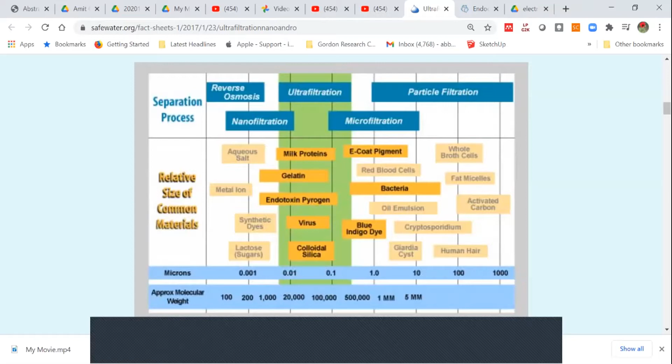So for that, we need to use what is called nanofiltration. A study now going on at Sde Boker at the Zuckerberg Institute of Ben Gurion University, led by Dr. Oded Nir, is shown in the next short clip.

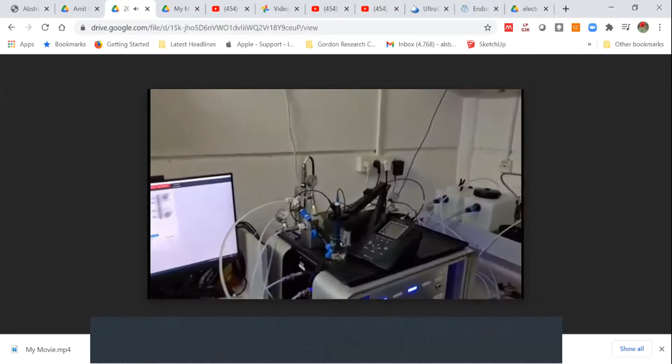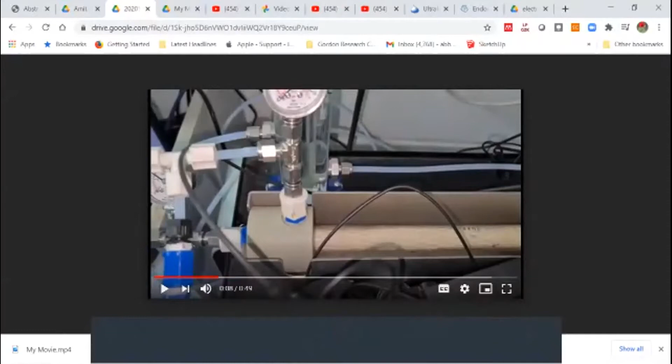Here you can see the automated system. This is a computer-controlled filtration system, and the heart of it is this hollow fiber module containing nanofiltration membranes. They're a specially developed membrane put together by the German collaborators at the University of Aachen, with Dr. Nir. These fibers are capable of retaining small compounds, endocrine disrupting compounds, and other kinds of contaminants. In addition, this membrane can retain inorganic ions such as phosphate, and by concentrating up the phosphate, it's conceivable it could be recovered.

If we take a look over here, we can see the feed container with the real effluent, and this is a concentrating system where it's running up. As the effluent is concentrated, what you see is an in situ camera looking at the suspension inside the municipal wastewater. As the phosphate concentration goes up, it can precipitate as calcium phosphate, which could then be recovered as a nutrient, something that could be contributed for fertilizer once it's been concentrated up.

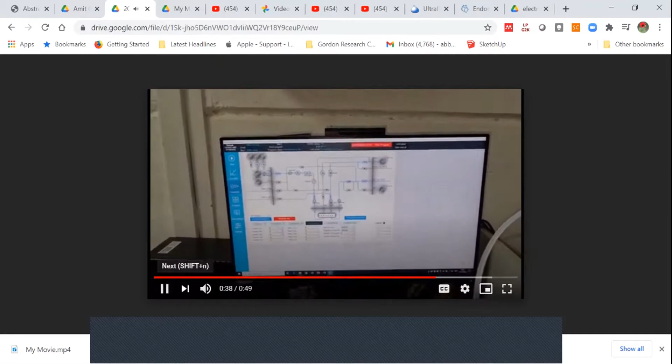As I said, this whole system is integrated with computer control and computer registration of the performance of the membranes. You can see the performance on the screen here. This is the flow sheet of the process, and now they're showing the performance.

What you see here is the flux in these hollow fiber membranes, and here you can see the transmembrane pressure drop. For the time they're running this particular experiment, with the concentration they've done so far, they've been able to run without any significant fouling, as the transmembrane pressure stays constant with the flux staying constant.

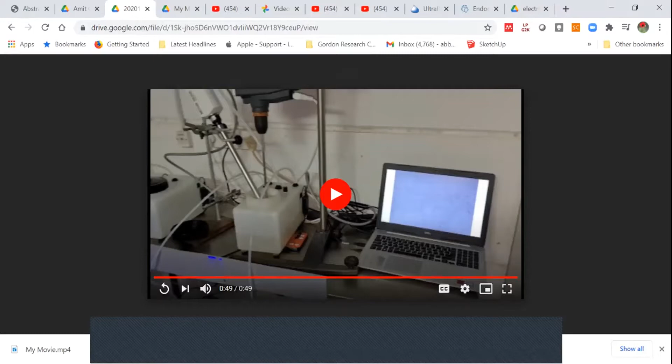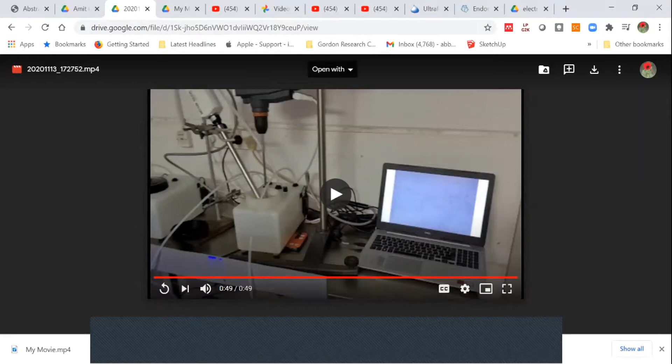So this is at the level of feasibility studies now being done in the laboratory, and we're now going to take you from the most basic lab scale to the largest scale, doing a guided tour of the Shafdan sewage reclamation plant, the largest sewage reclamation plant in Israel, treating all the water of the greater Tel Aviv area. As we'll see, that water is then being used for agriculture here in Israel.

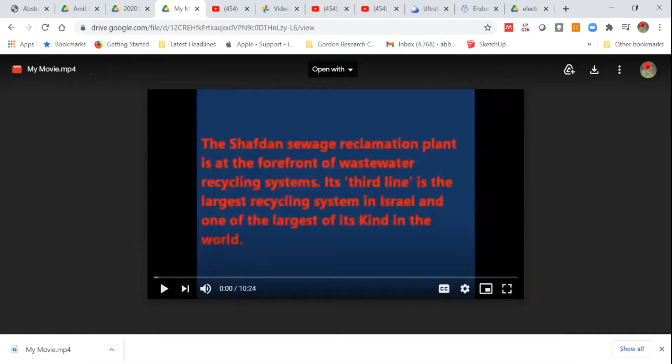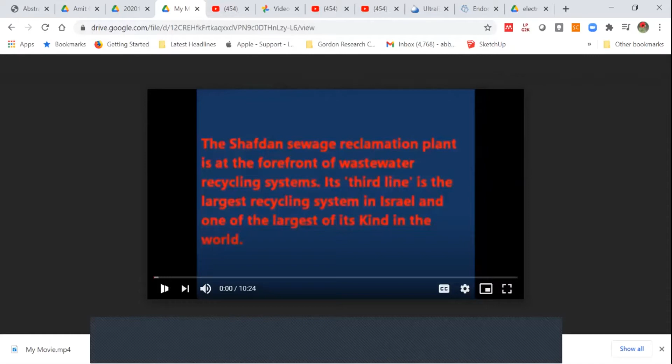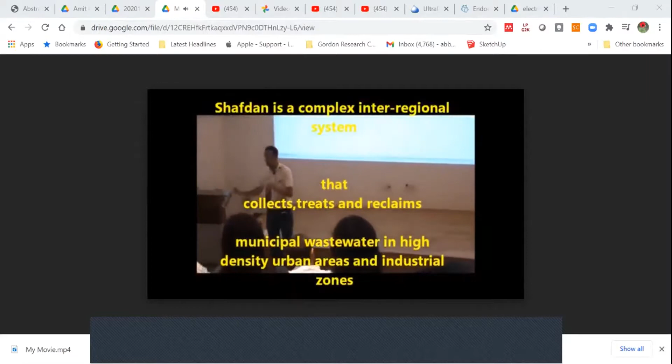I'll just comment before he goes on that in actuality, this water is not used as potable water. If someone drinks it accidentally, it's okay, but they actually have it running through separate lines that are not potable water lines, but lines for irrigation and agriculture. However, it is treated to a very high level, but it is not intended to be used as drinking water, but rather as irrigation water.

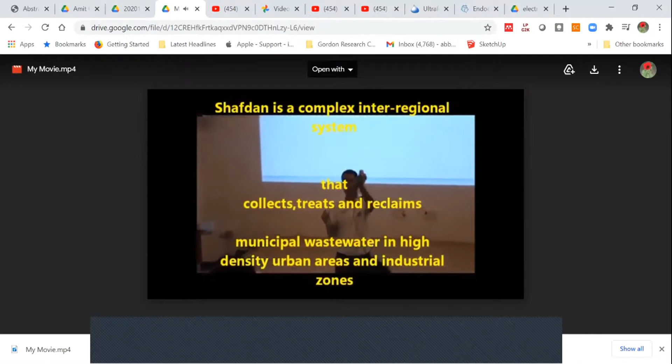We'll talk about sewage and how on earth to take this disgusting thing and transform it to potable water. Picture it. There you go. Now I feel like the president.

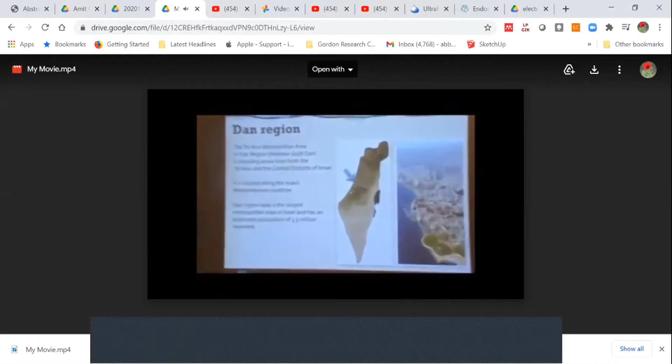And as you see, the map of Israel, and we have Tel Aviv City. You've been to Tel Aviv before? So Tel Aviv City, and the city that surrounds it, the metropolis, that's what we call Dan region. And it's the center of Israel. Why do we call it Dan region? Do you know?

So 3.5 million people in that region, and the biggest wastewater treatment plant in the Middle East, and one of the largest in the world. This is how it looks all about. Now beneath that region, 30 meters beneath the ground, we have a conveyance system.

To take the solids out of the wastewater, we have the bar screens, the pre-treatment. Basically huge combs that separate the solids from the water. This is how they look in real life. Soon, we'll see how they really work. This is how it looks. Very beautiful. There you go.

There is the scum. Here's a close-up. And another one. Very romantic. And it all goes out to a big trash container. From the trash container by truck, or to recycling, or to the dumping sites.

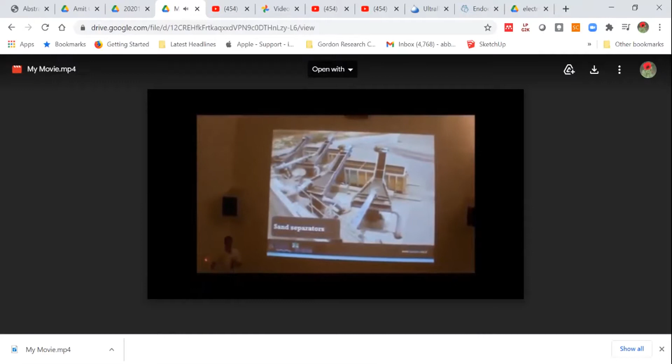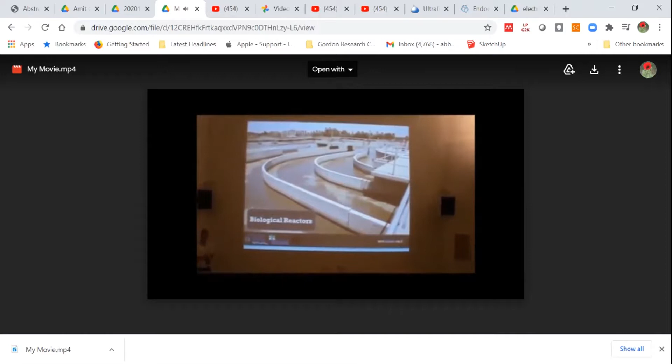Finally, we can start purifying the water. Biological reactors: all the wastewater and the nutrients are here. Then we have pathogenic diseases, we have the ammonia, we have the good bacteria that digest it. What will you do? This is actually separated into 3 stages: aerobic, anaerobic, and anoxic — with oxygen, without oxygen, and with certain levels of oxygen — to get rid of the pathogens, and then chlorine to kill some pathogenic bacteria.

In other countries in the past, they didn't really have plants like this because they had a lot of water, or they didn't have water but didn't have the money to do it. So these days, slowly, the world is waking up and started to build wastewater treatment plants. In Europe, we have a lot of them, in the United States, some even in Africa, in China, Singapore, all over the world.

It was one of the first. 10 years ago, it was the largest in the world. Today, it's only the largest in the Middle East. A lot of Israeli companies go around all the time building these facilities all over the world.

These days, in Nevada, California, Australia, China, and Zanzibar, all the time we're advancing. They're getting the money either from UN investments, or they have their own money, such as Nevada, California.

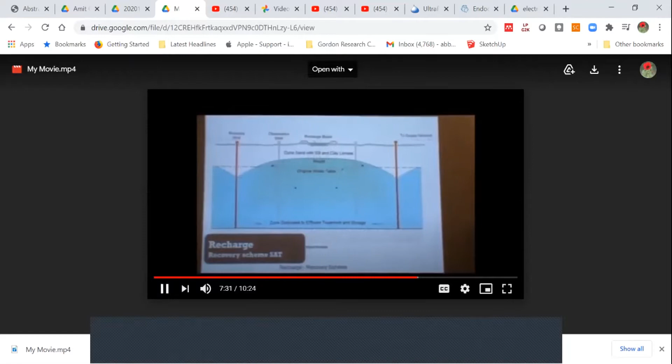And now we're going to see the real plant and the real machine. Hope it's a good day today. Seems like it. We will find out soon enough.

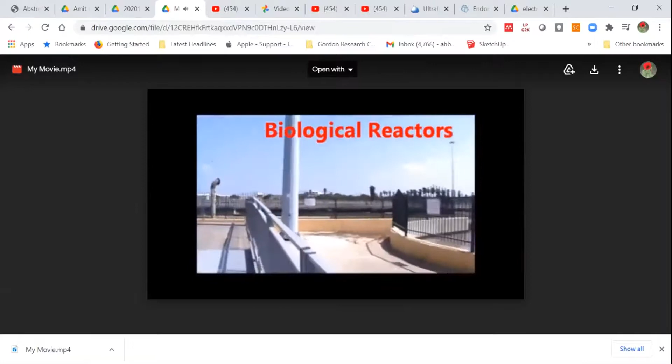There we are, I see you can smell it. Very nice smell. Inhale, exhale, very nice. From here, this stage, you can see the biological reactors to our left, to our right, and even in front of us. Aerobic, anaerobic, and anoxic stages will deal with the pathogenic bacteria and the ammonia.

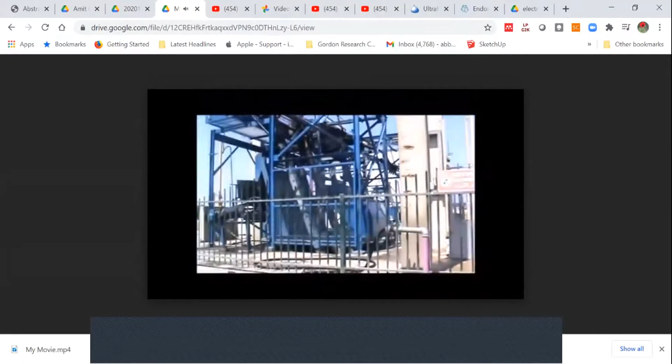Okay, so this is settling basin 1 out of 12. What happens here? This is the secondary effluent, which is why it smells better. After 1 day we have it here. At the beginning of the plant we have 20 bar screens that separate 40 tons of solids every day. Why do we have them again here? Because the pools are open - a pigeon can rest in peace here.

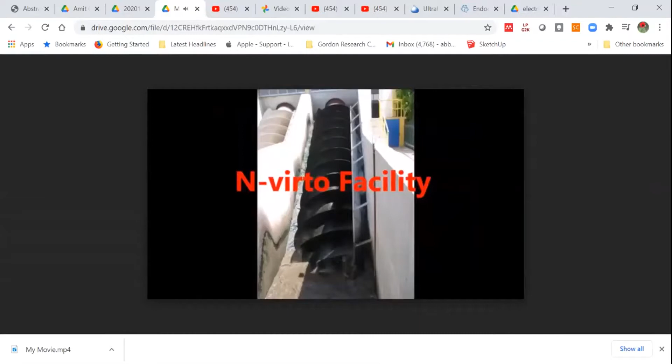So it takes the garbage out. So what do we see here? A settling basin - as we said, we have 12 of these. What happened to the sludge that we took out? 70% of the sludge will be returned to the activated system, to the biological reactors, the big pools with all the water in them - that's how we always have a lot of the good bacteria. 30% we need to recycle.

So that gives you a bird's eye view of the Shafdan plant. Today, Israel is recycling over 90% of its wastewater for agriculture, by far the highest extent of any country in the world, and that's why we're able to reduce the freshwater requirements of Israeli agriculture. Now we're going to look at the wastewater effluent, not from the point of view of agriculture, but from the point of view of epidemiology - that's coming up in the next clip.

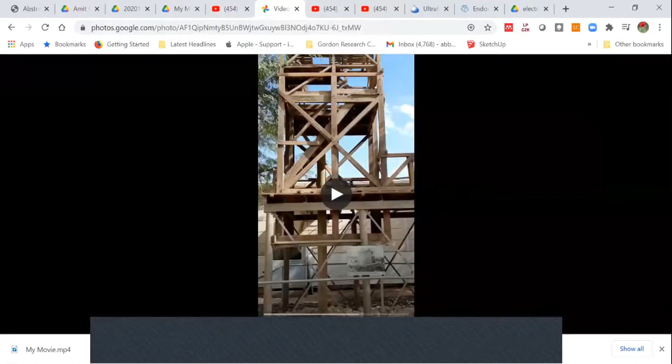Essentially, desalination with membranes began in Israel in the 1960s. It was preceded by seminal theoretical work done by Professor Ora Kedem and the late Professor Aaron Katzir, who developed the basic theory for the transport of salt and water through membranes.

There were two membrane-based processes that were looked at, both examined in the mid to late 60s. The first was electrodialysis, in which feed water comes into a chamber bounded by an anion exchange membrane and a cation exchange membrane. The electric field applied pulls the ions out into a concentrate chamber, adjacent to the diluate chamber, the product water chamber, and in this way is able to desalinate the water.

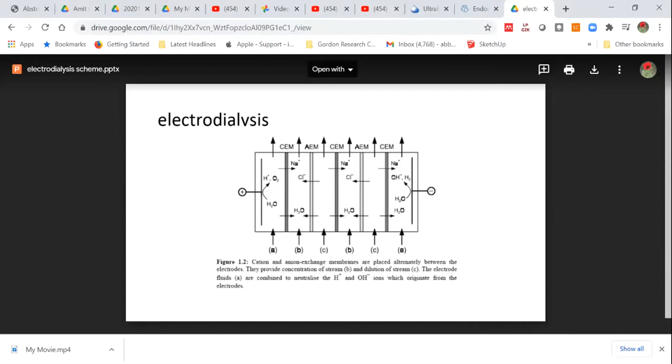Electrodialysis systems were developed and put into place at the Institutes for Applied Research, which was an institution that preceded Ben-Gurion University, and from that group came part of the Desalination and Water Treatment Department that is now part of the Zuckerberg Institute. The first system that was set up was not too far from Midreshet Sde Boker.

Modern day desalination in Israel began over 50 years ago in 1968 when an electrodialysis desalination unit was placed in Mashabei Sadeh, just a 6-7 minute drive from Sde Boker. This led to the preparation of reverse osmosis desalination based on the invention of the late Professor Sid Loeb, who made desalination membranes inside 4 to 6 meter long half-inch tubes, prepared inside the system shown here.

Here you can see a long cylindrical vertical channel in which the membranes were placed, and a polymer solution was drawn up through the inside of those membranes to put a thin polymer coating on the inside, so that they could pass water and stop salt in the reverse osmosis process.

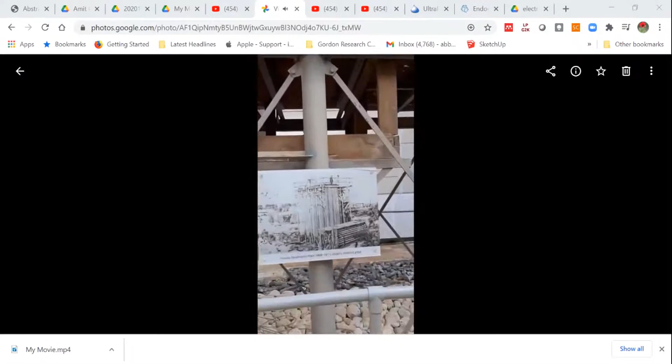Those membranes were then installed in a unit that was put in Yotvata. You can see the picture here of the plant at Yotvata, where they provided the first desalinated drinking water for this settlement in the Arava.

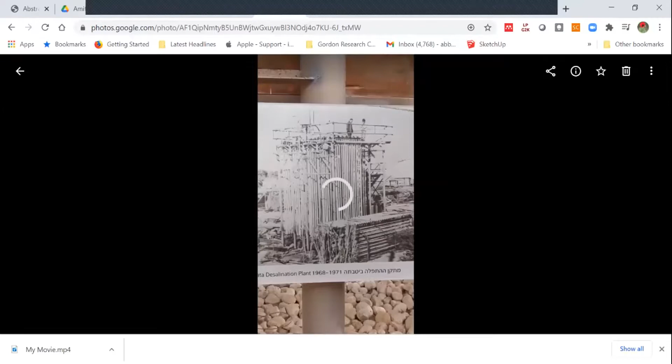It's hanging up right now. Just a second, let's see if we can get this to work. Okay, we have a problem with that particular film. I'll go on to the next one. Stop share, and I'll do share screen again.

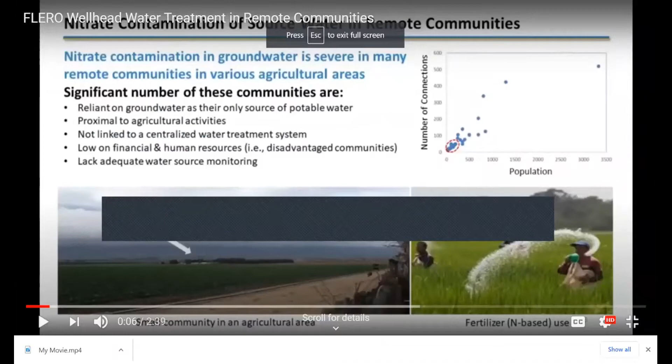What you see here is a problem with nitrate contamination and salt contamination of groundwater in communities with intensive, industrialized agriculture. Communities of farm workers living on this land are left with water that is not fit for drinking, facing difficulty obtaining a reliable source of potable water because of both salinization and increasing nitrate contamination of the groundwater from agricultural activity. So a system needs to be found to provide a solution for these communities.

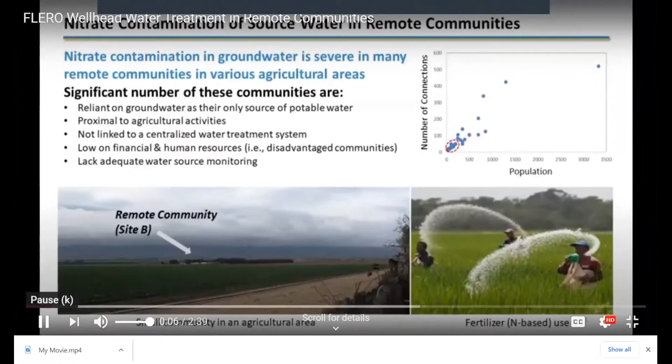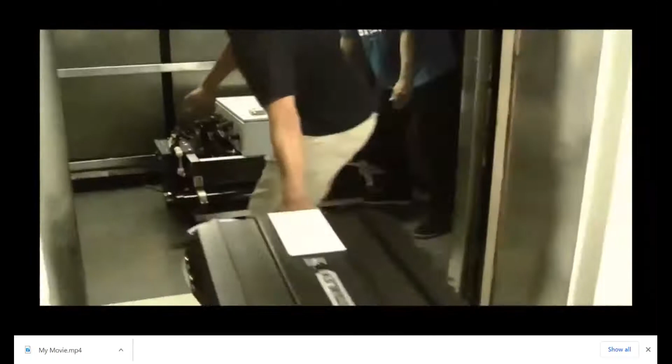So you can see the reverse osmosis system that's going to be used. Flero is a novel smart RO system of compact design that can operate seamlessly across a wide salinity range, from brackish to seawater. This short video clip documents a recent field test of Flero in the California San Joaquin Valley. Flero, along with its various sensors, including our newly developed nitrate monitoring system, were transported from UCLA to our field site. We reached the field site in about 3.5 hours.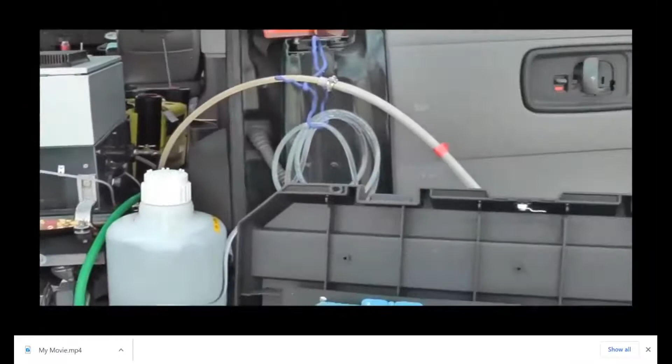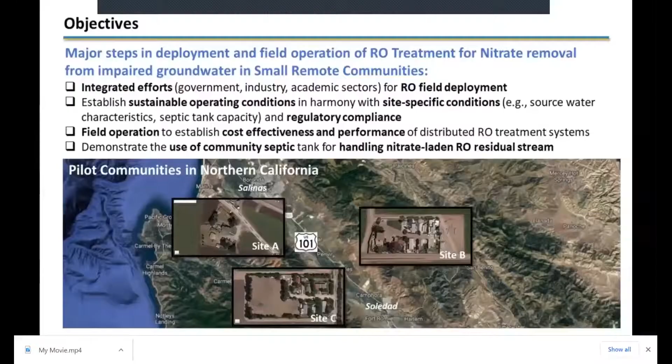So this is a case where, again, there's nitrate contamination, and small remote communities need a system matched to their needs, because of site-specific conditions, like septic tanks that limit what they can do, and regulatory compliance. Essentially, they need to handle these nitrate-laden systems, where they get a high nitrate concentrate from the RO system, and design it so that those high-nitrate brine systems can be treated by their community septic tanks.

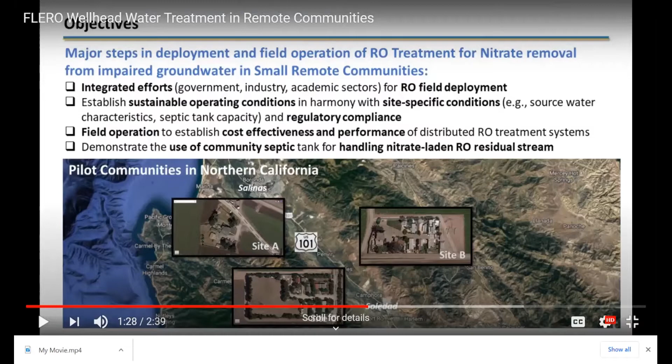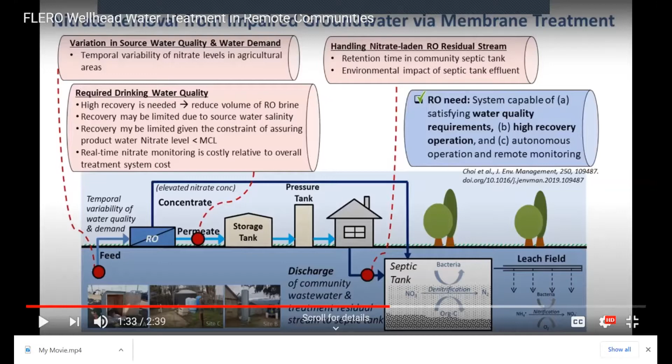So here you can see what needs to be done. They take the feed from the groundwater. Permeate is, of course, used by the household. The concentrate plus the household sewage together go into the septic tank, where they undergo denitrification. Once denitrification has been completed so that there are not high nitrate levels, they can discharge from the septic tank into a leach field. So in this case, they needed high water quality, but also high recovery operations so they wouldn't waste this precious resource.

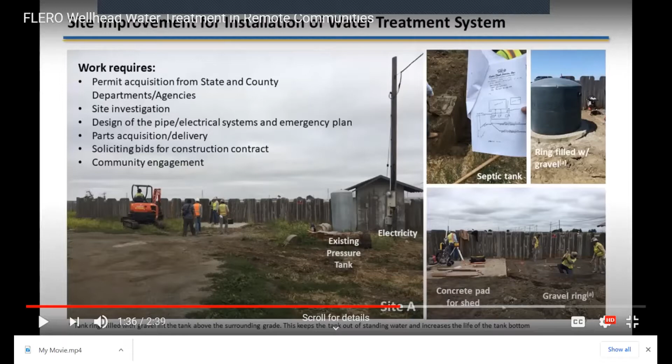That's quite high. To develop the system and make it an automatic system they knew would work properly, they developed their own proprietary nitrate sensors that could monitor the nitrate both in the feed and in the permeate as a way of determining that they were getting the performance they needed.

Okay, so that covers the flexible RO system. This is a system for small communities where you need something that's distributed. Those of you that heard the lecture of Professor Amos Winter in the Water and Agriculture session earlier today heard about the same kind of challenges that system was designed to cover. This system is equally designed to cover a distributed system that can be deployed where there are small communities that need improved quality water from the degraded water sources that presently exist.

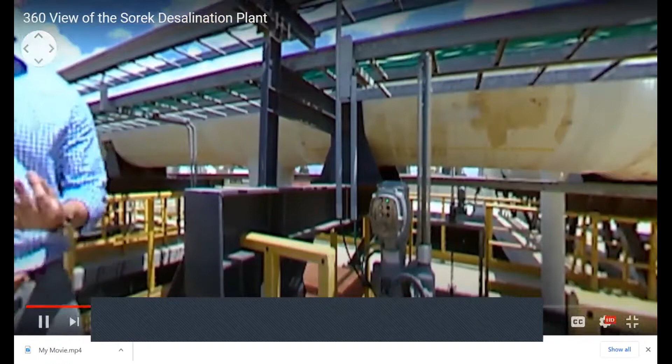Welcome to a 360-degree tour of the Sorek desalination plant here in the heart of Israel. Sorek is the world's largest seawater reverse osmosis project, providing enough water for 3.8 million people per day, meeting 20% of Israel's water demands. Delivered by IDE Technologies and Hutchison Water International, Sorek has been awarded for multiple engineering innovations, including the use of 16-inch vertical membranes. So join me now for a 360-degree tour.

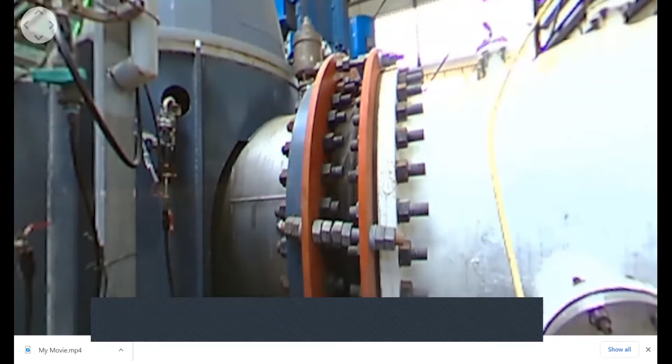Here you can see the Palmachim beach, located 2 kilometers from the Sorek site. Using pipe jacking techniques, IDE Technologies was able to connect the sea to the desalination plant without disturbing the Sorek National Park. Moving on to the pumping station, here you can see the diameter of the pipe used to feed the plant. A total of 7 pumps are installed here, pumping 54,000 cubic meters per hour of fresh feed water.

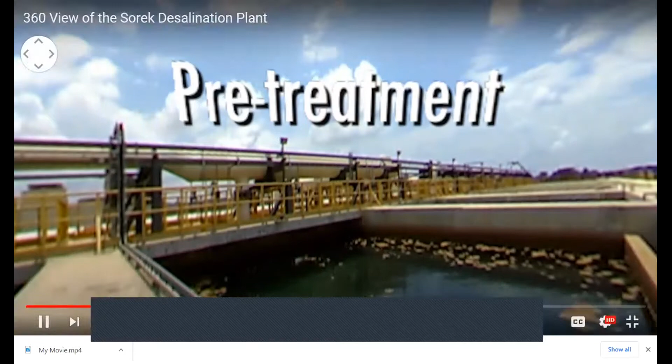For the next stage of the process, you can now see the pre-treatment, an essential line of defense to protect the membranes. Dual media gravity filtration acts as a barrier to prevent the seawater reverse osmosis membranes from fouling.

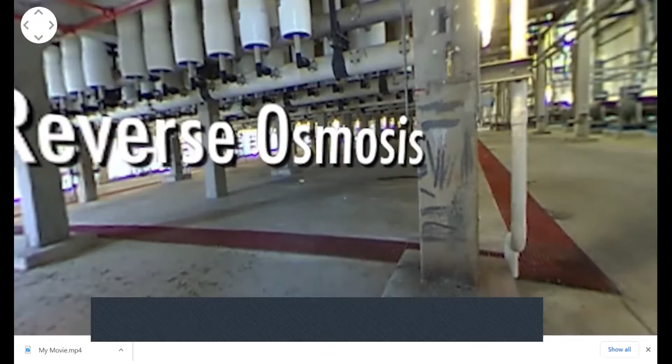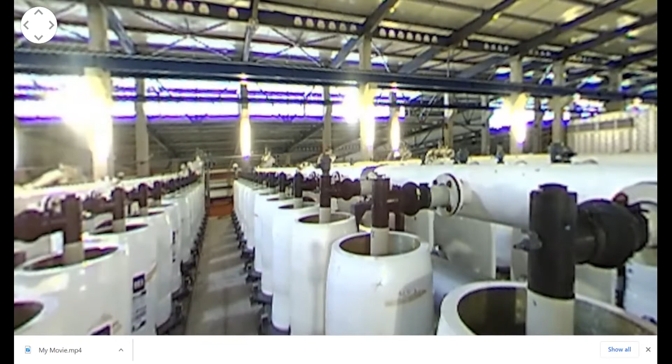Next, we have the heart of the Sorek desalination plant, reverse osmosis. Here you can see the innovative use of 16-inch SWRO membranes. Around 10,000 modules are used with 8 membranes per vessel. By using the membranes vertically, it has led to a minimized plant footprint, lower installation costs, and shorter pipes, reducing the amount of high-grade metals needed for the process.

Brine is a byproduct from the seawater desalination process. It's a concentrate brine being mixed by a diffuser with seawater before being returned to the sea at a depth of 20 meters. An online monitoring system working 24 hours a day ensures that all environmental regulations are met, in the process minimizing any impact on the sea.

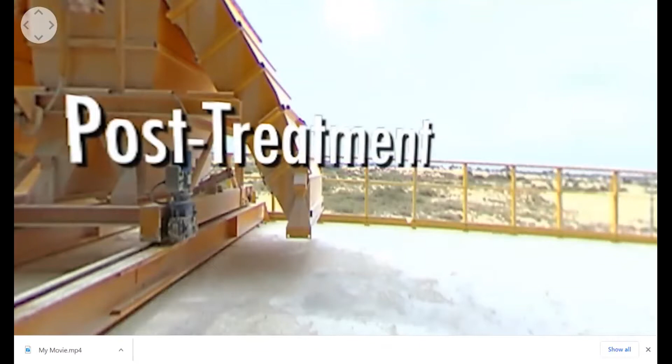Next, we have the remineralization process. Following membrane filtration, which takes out all the salts from the seawater, minerals such as calcium, essential for our health, are added back into the water. Limestone treatment, followed by final disinfection, helps to achieve final water quality.

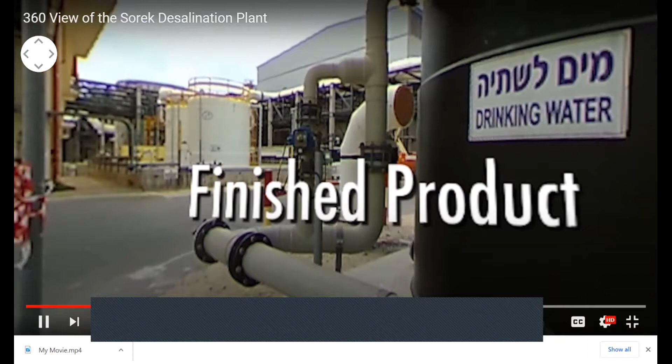Finally, we reach the brain of the operation, the control room. Although the plant can produce 624,000 cubic meters per day of potable water, using a fully automated process means a very low number of plant operators is needed. The design of the plant, together with operation and maintenance know-how, has enabled IDE Technologies to change its output depending on the time of day.

So we hope you've enjoyed the 360-degree tour here at Sorek in Israel. Sorek has proven it's possible to deliver large-scale, environmentally sensitive seawater reverse osmosis despite facing a challenging site footprint. Together with the Ashkelon and Hadera facilities, also provided by IDE Technologies, Israel now provides 70% of its water through 5 desalination plants. Thanks for watching.

Okay, so that concludes the virtual water tour. If anyone has any questions about something they saw in the tour, I'll try to answer what I can.